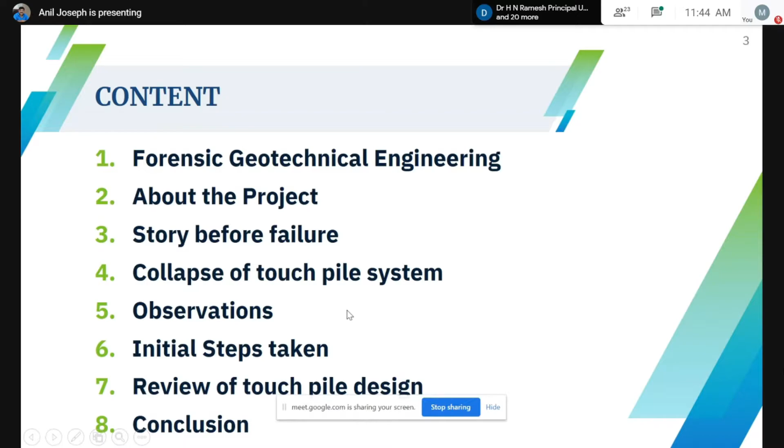I will be covering my talk under the following heads: forensic geotechnical engineering, what it is, the project I am going to present today, the story before the failure, the collapse of the touch pile system, observations, initial steps taken, review of touch pile design, and the conclusion.

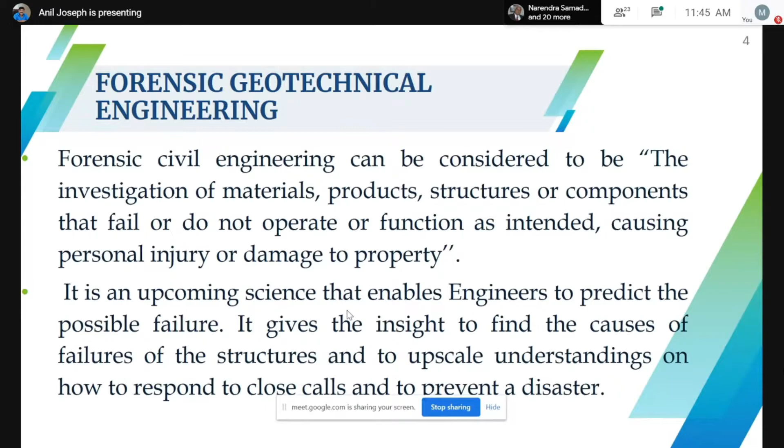Forensic civil engineering can be considered to be the investigation of materials, products, structures, or components that fail or do not operate or function as intended, causing personal injury or damage to property. It is an upcoming science that enables engineers to predict possible failures. It gives the insight to find the causes of failure of the structure and to upscale understanding on how to respond to close calls and prevent a disaster.

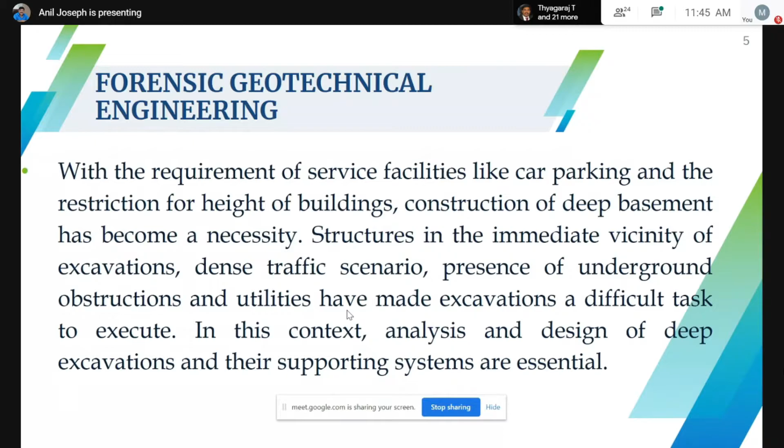With the requirement of service facilities like car parking and restrictions on building height, construction of deep basements has become a necessity. Structures in the immediate vicinity of excavation, dense traffic scenarios, presence of underground obstructions, and utilities have made excavation a difficult task to execute. In this context, analysis and design of deep excavation and their supporting systems are essential.

The basic steps which should be carried out by design engineers for deep excavations are: site characterization, selecting dimensions of excavation, surveying adjacent structures, establishing permissible movements, selecting earth retaining system, selecting supporting and construction scheme, predicting the movements, comparing predicted with permissible movements, altering the supporting and construction scheme if needed, monitoring instrumentation, comparing monitored results with predicted and permissible values, and altering bracings and construction.

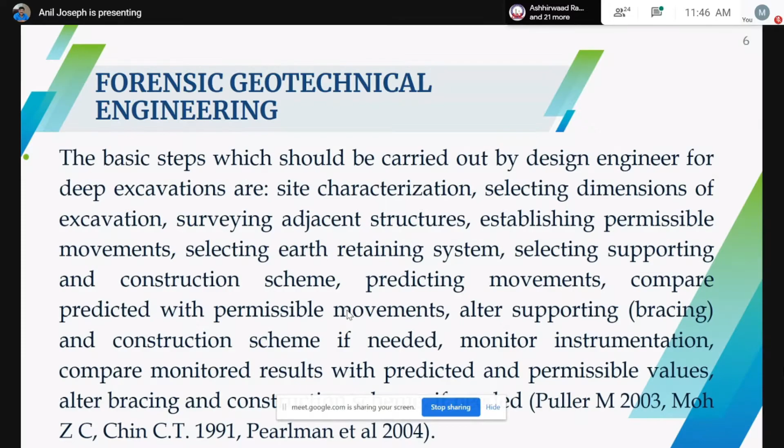Structural engineers work with engineered materials such as concrete and steel that possess unique and well-defined properties of density, elastic modulus, compressive strength, etc. On the other hand, geotechnical engineers deal with soil, a material made by nature or God with highly variable spatial and temporal properties.

Structural designs are code-based since theoretical closed-form solutions are derived based on given geometry, material properties, and loading. However, geotechnical designs are judgment-based, due to highly variable geometry, complex loading, and material properties that are not precisely determinable, and that's the challenge.

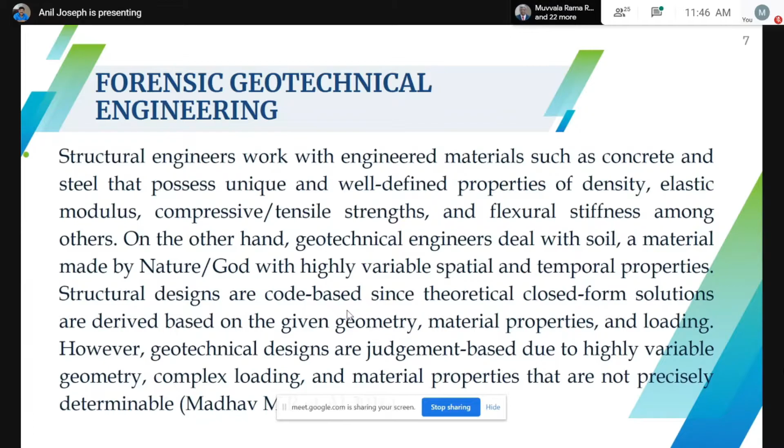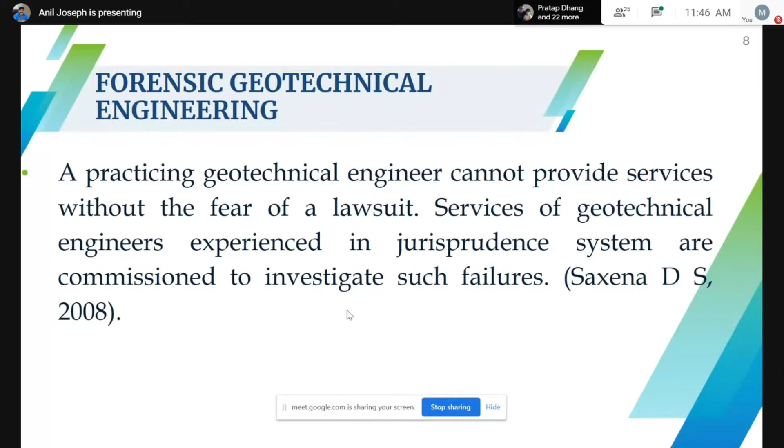This is from Madhav's literature: a practicing geotechnical engineer cannot provide service without the fear of a lawsuit. Services of geotechnical engineers experienced in jurisprudence systems are commissioned to investigate such failures.

Now coming to the problem which I want to share with you today: the touch pile system failure at Kochi, Kerala. So this is the project.

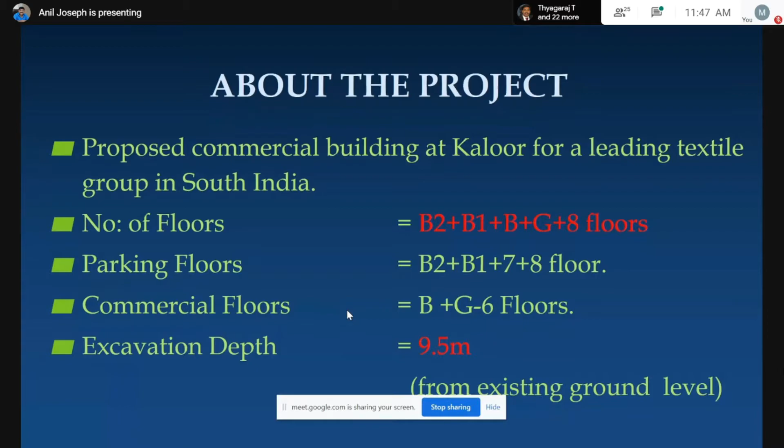It's a B2, B1 basement, ground and 8 floors building. We have parking in the two basements and on the seventh and eighth floor, and commercial floors from basement to ground to the 6th floor. The bottom level of B2 was at 9.5 meters.

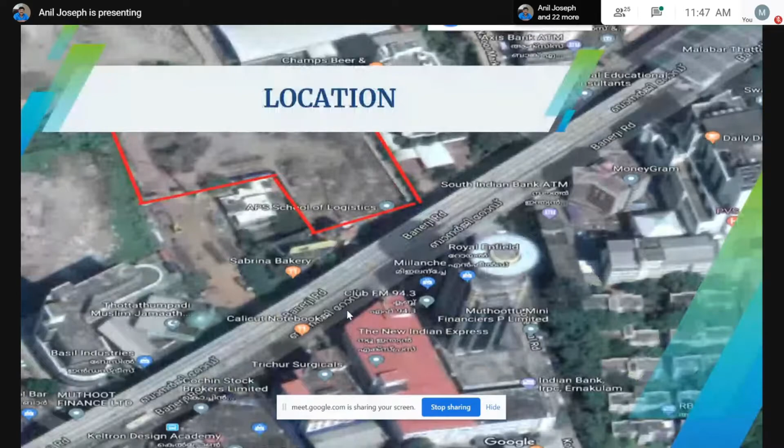The touch pile system, which was designed by a leading structural engineer based out of Chennai, comprised of 337 piles of 900 diameter, extending to a depth of 30 meters, and 28 soldier piles of 600 diameter to a depth of 30 meters. Building piles were taken to very dense strata at 43 to 46 meter depth.

The touch pile system was designed as a propped cantilever to resist the lateral load, because once the propping comes in, the bending moment and shear force get reduced considerably and economy in the design can be brought in.

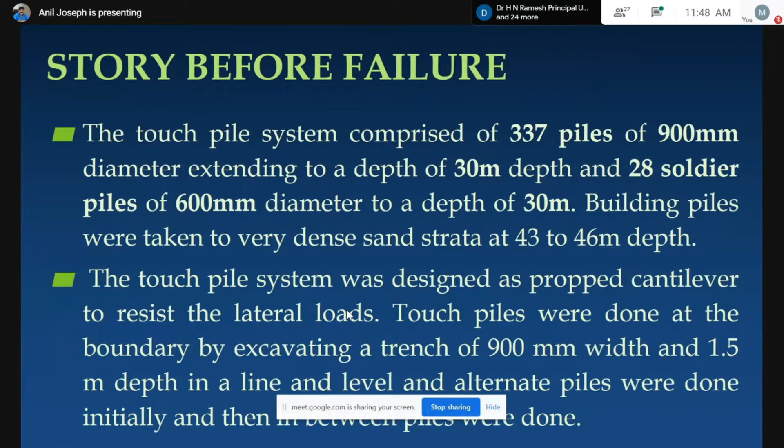Touch piles were done at the boundary by excavating a trench of 900 width and 1.5 meter depth in a line and level, and alternate piles were done initially, and then the piles in between were done.

After completion of shoring works, excavation was done in 3 phases. In the first phase, they excavated up to 2 meters. The second phase went up to 6.5 meters, and the third phase excavation was planned up to 9.5 meters.

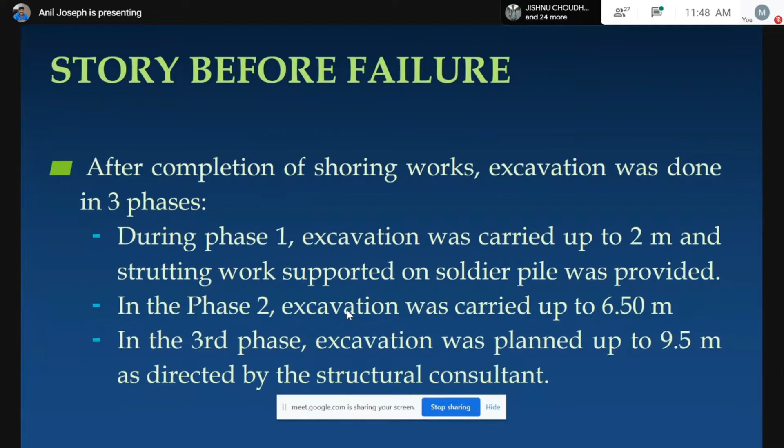So this is the video of the site, and here you can see what was happening. This was on the crucial day of 19th April 2018. You can see the video running here, taken at about 5:36 p.m.

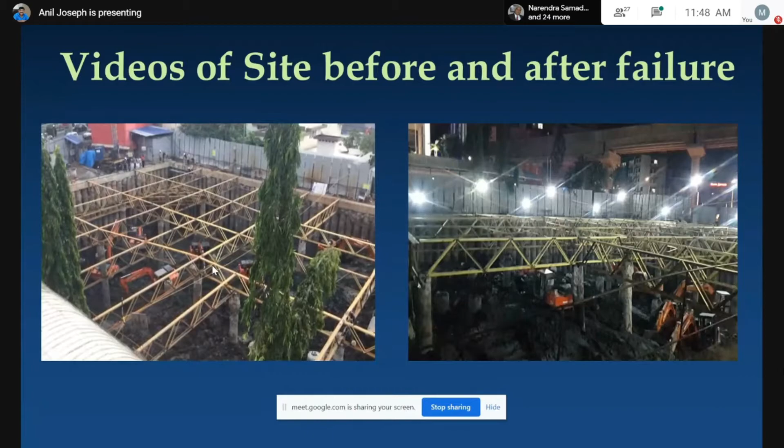By 7 p.m. there was a slight movement, and the wall had tilted by 20 centimeters. They were quite worried about what to do about that.

They asked us, as the local person, what had to be done. We told them it was better to evacuate the people. By around 8 o'clock it started moving further, and by 9 o'clock this happened.

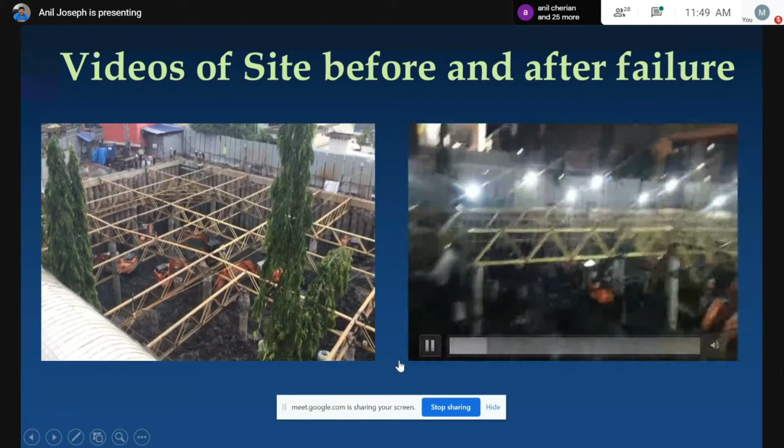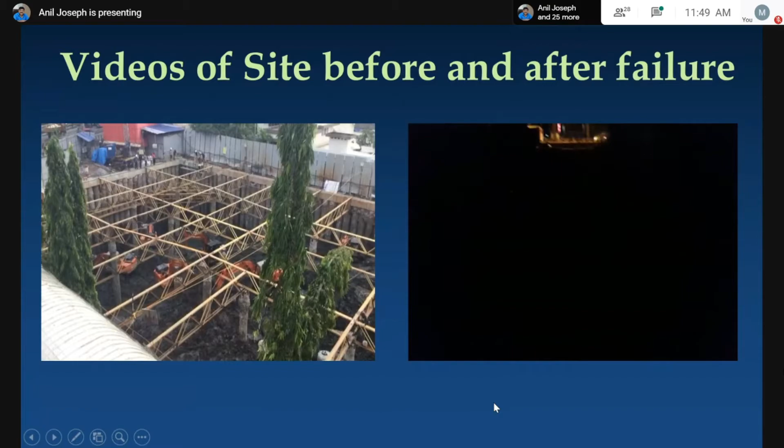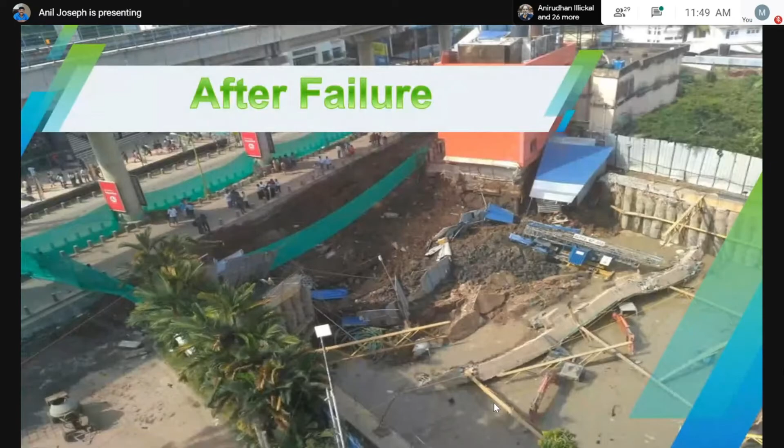That was the video of the failure as it was happening, and these are the photos taken after the failure from the adjacent building. You can see here that the foundation is getting exposed, and this is the after-failure photo.

During the excavation, like I pointed out, at 5:30 p.m. the movement happened and deflection increased by 100. The site team sought advice, and we asked them to stop the work and evacuate the people.

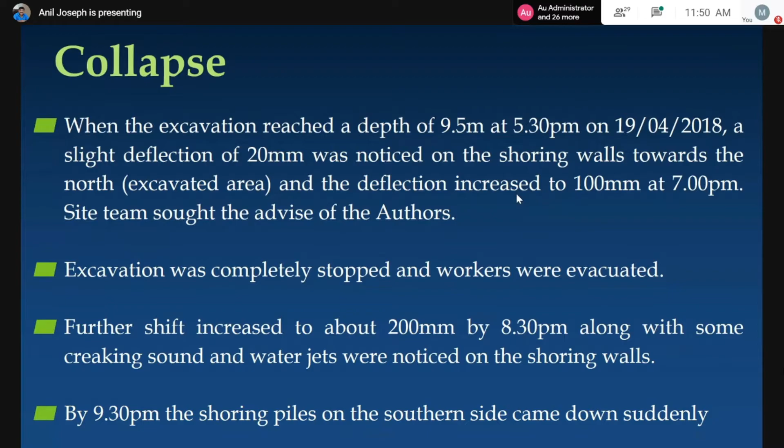The shift further increased to 200, along with some creaking sound, and water jets were noticed on the shoring wall. By 9:30 p.m., the shoring piles on the southern side came down suddenly.

Now, observations after the collapse. Due to the collapse of the touch pile system, the nearby road and earth sunk by approximately 3 meters on the south side of the excavated area. There was lateral shifting of the piles near where the earth had sunk, on the southwest side of the excavated area.

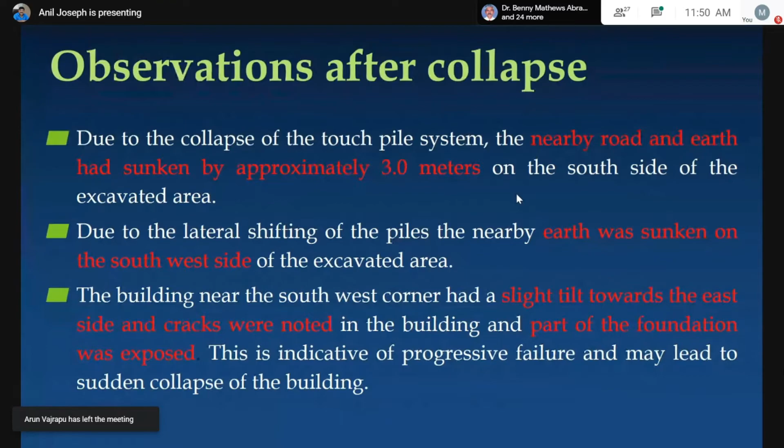The building near the southwest corner had a slight tilt towards the east side, and cracks were noted in the building, and part of the foundation was exposed. This is indicative of progressive failure and may lead to sudden collapse of the building.

Cracks were noted at ground level on all the other three sides of the excavated area. The roads, paved with interlocking tiles, showed differential settlement.

Public utilities such as road, traffic, electricity, and water supply were adversely affected by the collapse. It also resulted in a temporary halt in the working of Kochi Metro, since the structure was very close to the metro station at Kaloor.

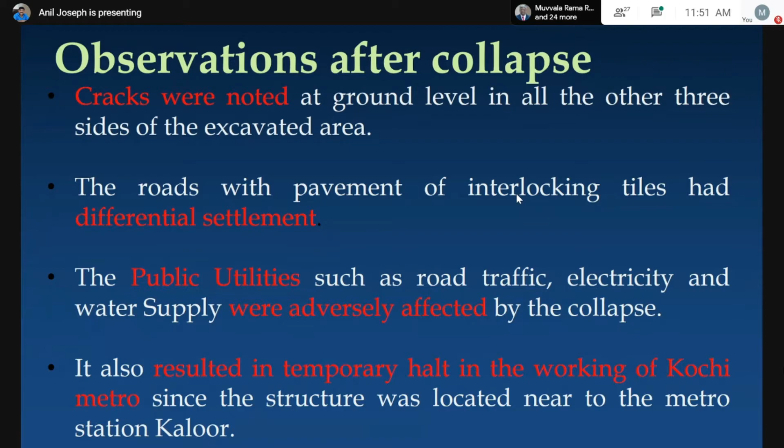So an immediate action plan was made. We were called in, we visited the site, and a committee was formed by the District Disaster Management Authority.

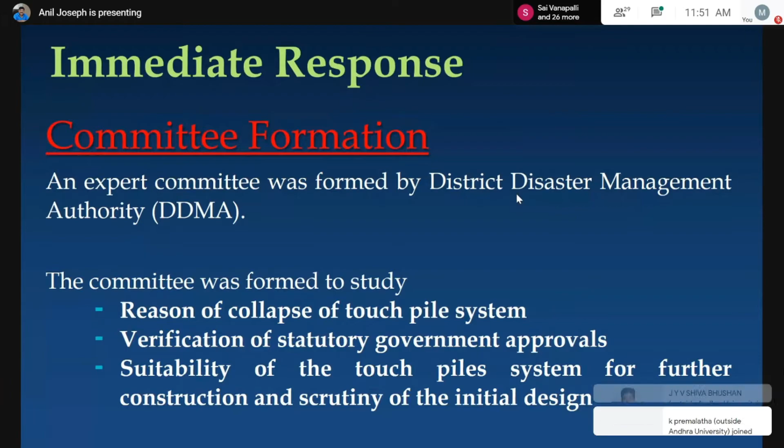The job entrusted to us was to study the reason for the collapse of the touch pile system, verification of statutory government approvals, suitability of the touch pile system for further construction, and scrutiny of the initial design.

These are the steps we took. Since traffic was affected, we rerouted the public traffic. We refilled the excavated area because we felt further collapse was likely, and the adjacent building might be affected.

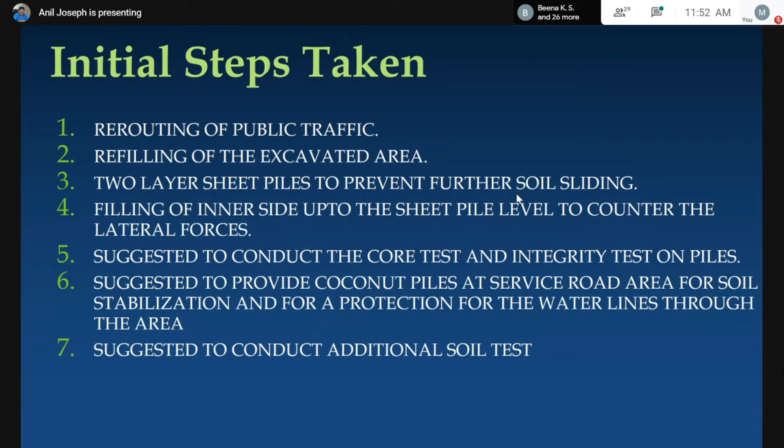Additional soil investigation was done to study what had gone wrong. So these are the snaps. We refilled the area by 5 meters to prevent further damage.

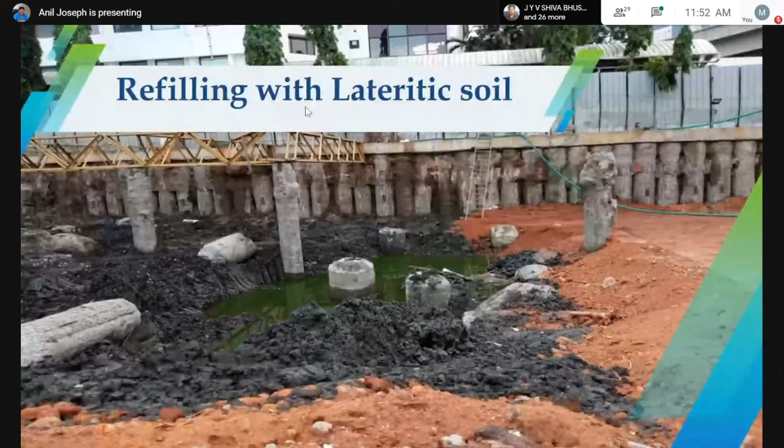This is the refilling done with lateritic soil immediately, to balance the thrust so that there wouldn't be further collapse.

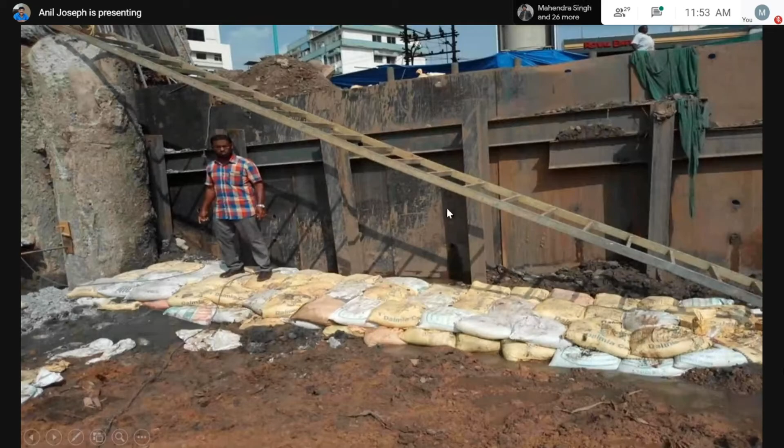The double braced sheet piling was provided, and we went for the concrete core test to find out the reason of the collapse. 11 samples were taken, eight from the touch pile and 3 from the tie beam.

Pile integrity test was conducted, where we had the support of one of our co-members in the Indian Geotechnical Society National Committee, Ravikiran Vaidya, who did that for us, to understand what was the exact point of the failure.

Additional soil investigation to confirm the parameters of subsoil strata was carried out. Geotechnical and structural modeling at different levels was carried out using Plaxis and STAAD software to find out what was the cause of the failure.

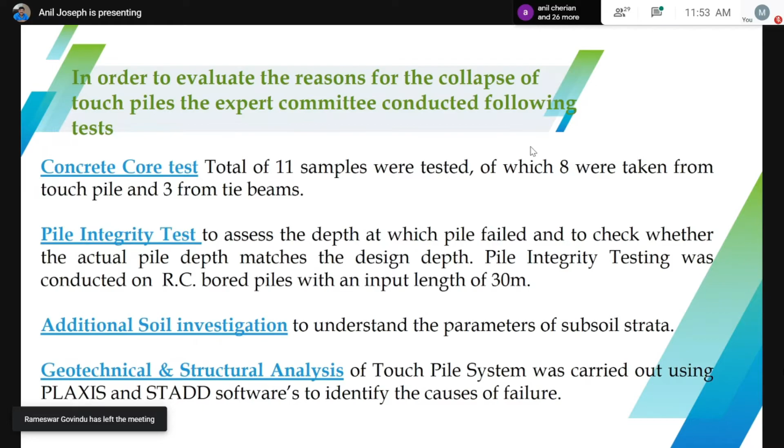Here you can see the integrity test happening, soil testing happening, the core samples getting recovered, the core test was conducted, and it was found that cube strength values were higher than design value, so that was not the problem.

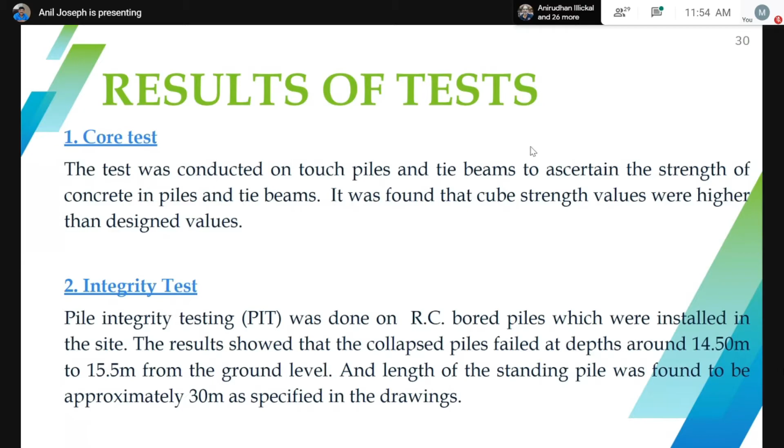Pile integrity test was done, and we found that the piles had collapsed, sheared off at a depth of about 14.5 to 15.5 meters from ground level, and the length of the standing pile was found to be approximately 30 meters as per the design itself.

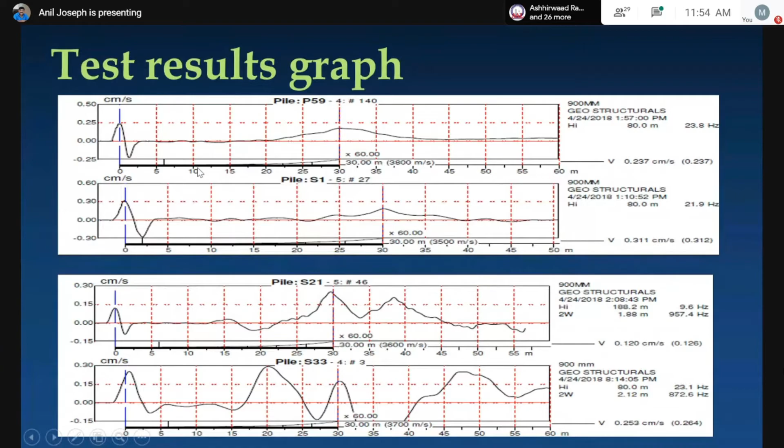This is the data from the pile integrity test, carried out immediately after the collapse. You can see where the damage has been heavily concentrated, where the strata changes, and the damage is also noted at those points.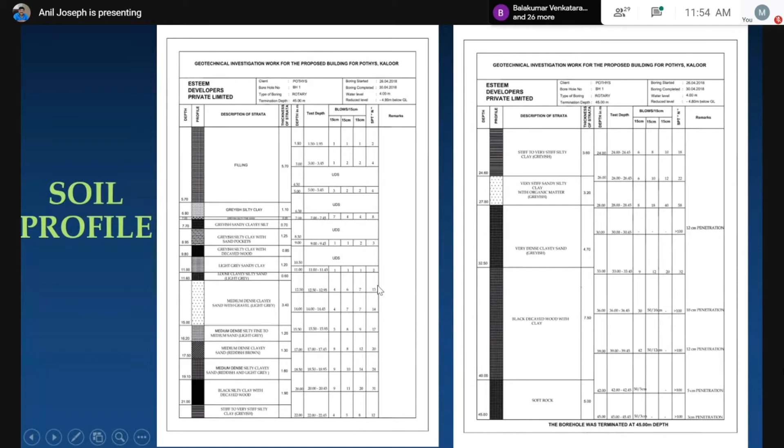This is the additional soil investigation work which was carried out. You can see that Cochin comprises very soft marine clay, and up to 14 to 15 meters there is not much support value.

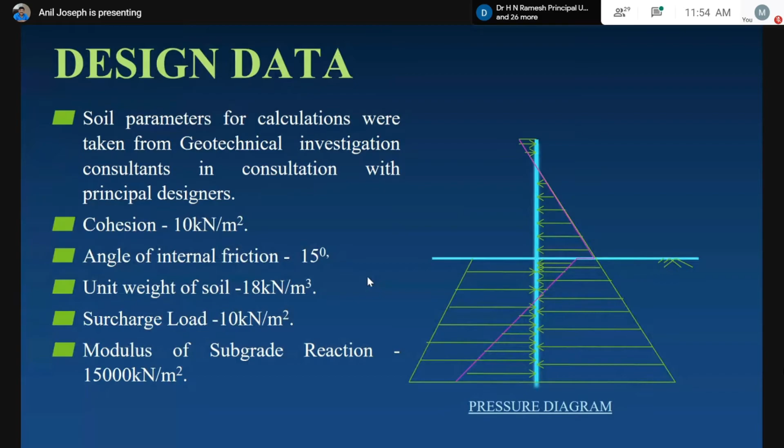We went for modeling analysis to carry out the review of the touch pile design. Soil parameter calculations were taken from the geotechnical data, and these were the different components taken. This is the pressure diagram, and the capacity of the touch pile was worked backward.

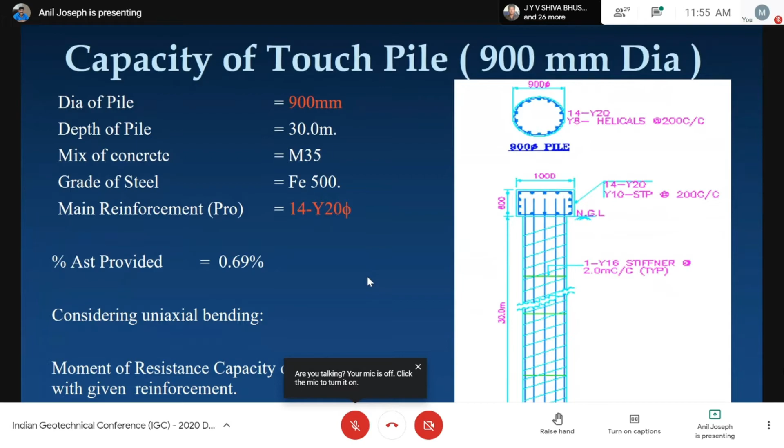The diameter was 900 mm, M35 was the grade of concrete, and we worked out the steel provided, finding that the moment of resistance capacity of the pile was 815 kilonewton meter. That's the one point I would like you to note.

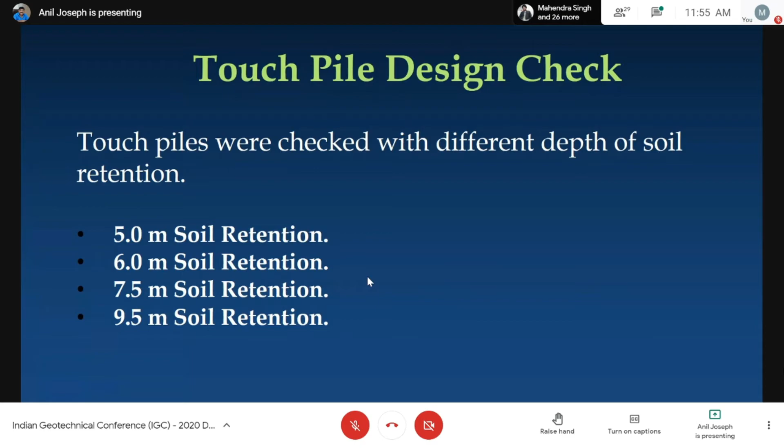Touch piles were checked at different depths of soil retention - at 5 meter, 6 meter, 7.5 meter, and 9.5 meter excavation. At 5 meters, maximum deflection was 44 mm, maximum overturning moment 350, and with MRS of 850, it is safe at an excavation of 5 meters.

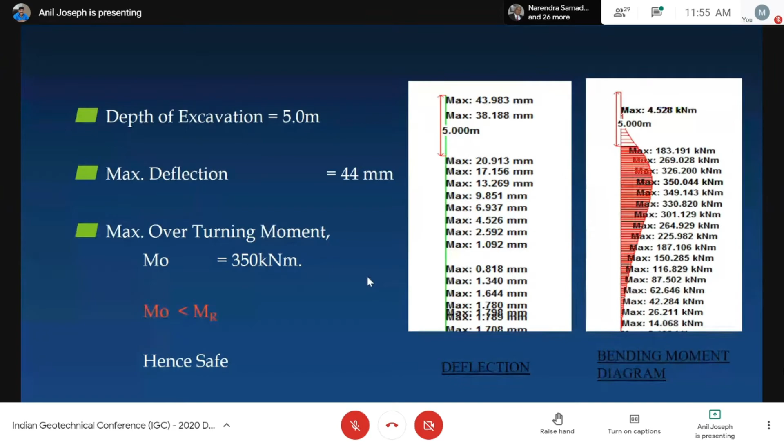At 6 meters, deflection moved to 90 mm, with 633 giving factor of safety of 1.3. Deflection is found to be slightly higher, but since it's a temporary structure, it seems okay.

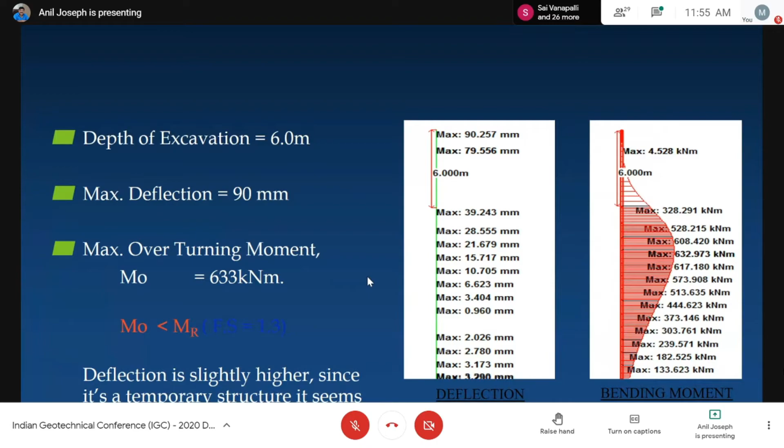Once we move to 7.5 meters, maximum deflection moved to 179 mm, and the overturning moment crossed the permissible capacity - not safe. Deflection and overturning moments are higher, and the bracing system of the touch pile has to come into action to transfer the behavior.

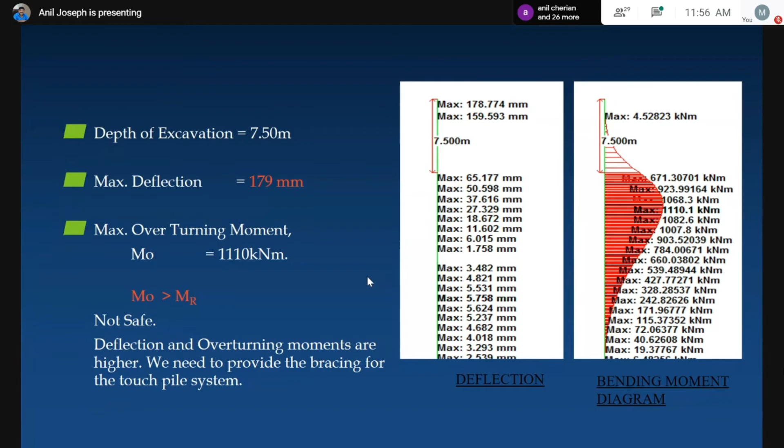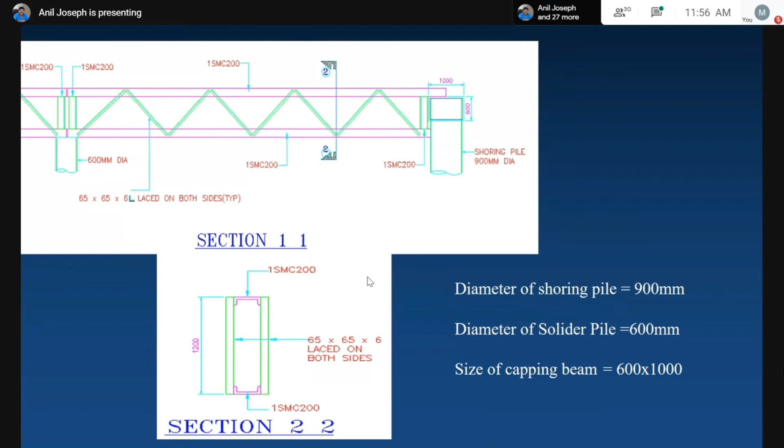This is the bracing system that was put in place. You can see the ISMC double section of 1.2 meter beams provided, with lacing done by 65 angle, and this is the shoring pile diameter and the soldier pile sizes. This is the retention modeling.

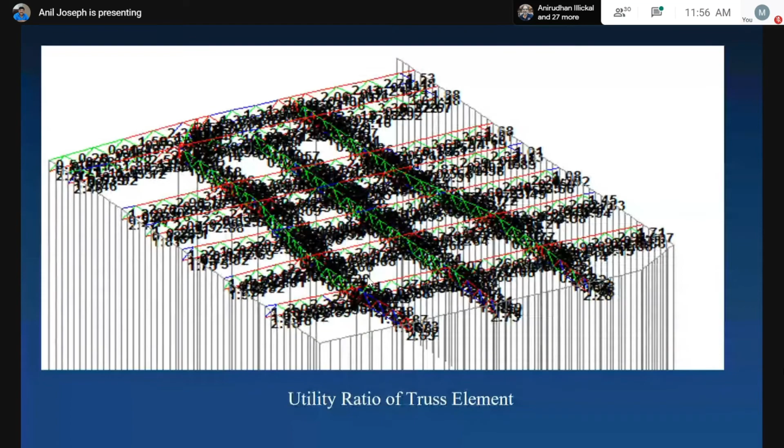You can see the three-dimensional model with the spring and the utility ratio just at the brim - already very close. When the excavation moved to 9.5 meters, we found the deflection was 400 mm, and the movement was much higher than what the pile was capable of withstanding.

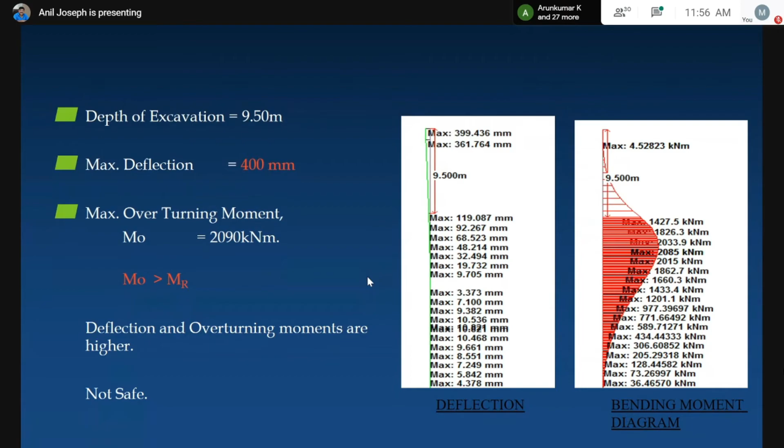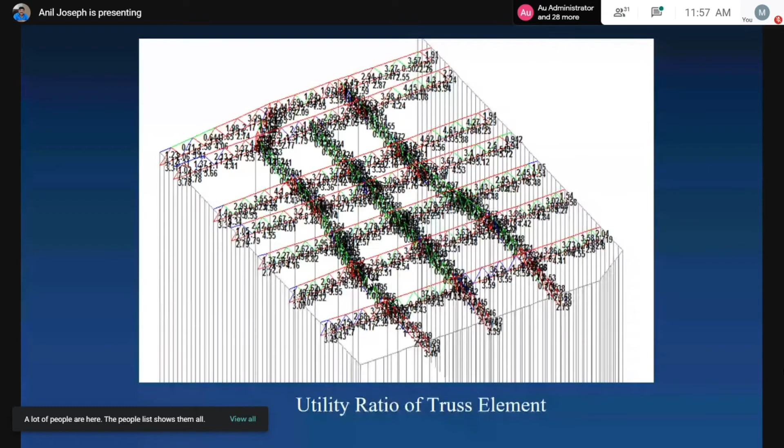So that is 2090 kilonewton meter, and deflection and overturning moments are higher, and it's not safe. For the 9.5 meter strata, the utility ratio jumps up to the range of 3.55 to 3.7, indicating inadequacy of the bracing system to take care of the loading which is going to come. Since there is failure in truss element, deflection and overturning moments were also much higher.

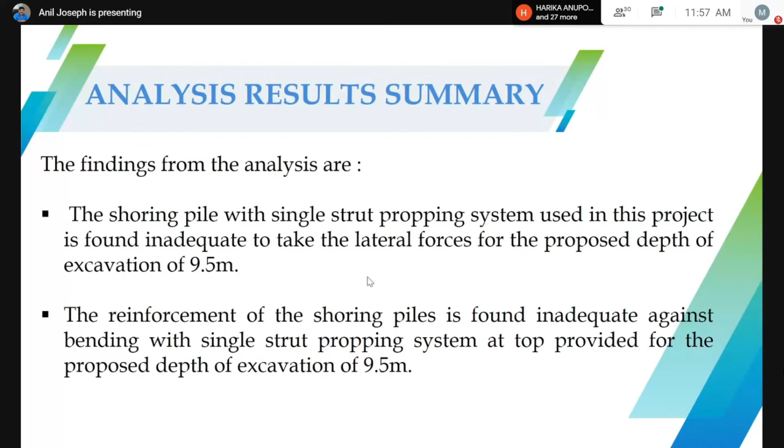So the analysis result summary: the shore pile with single strut propping system used in this project is found inadequate to take the lateral forces for the proposed depth of excavation of 9.5 meter. The reinforcement of the shoring pile is found inadequate against bending with the single strut propping system at top provided for the proposed depth of excavation of 9.5 meter.

For excavation carried out up to 6 meter depth, the touch pile system comprising of 90 centimeter diameter piles without strutting was adequate. When depth reaches 7.5 meter, the strutting system was found to have marginal deficiency to take up the earth pressure, and for the depth of 10 meter, the provided touch piling system and strutting was grossly inadequate to take up the lateral thrust.

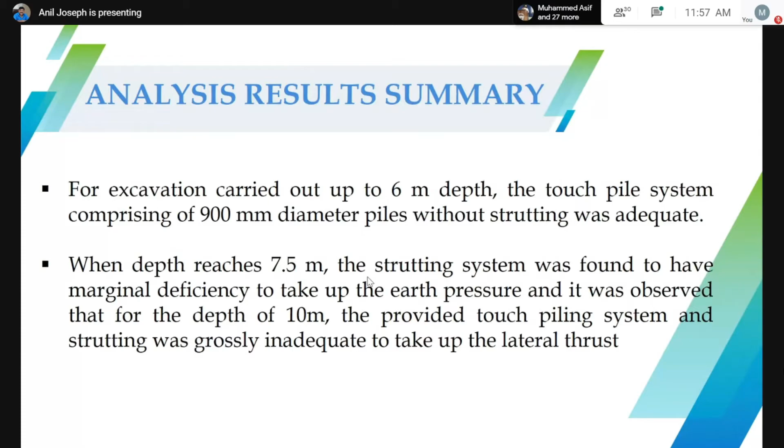The strutting system used was a series of truss beams in a grid pattern but not orthogonal to each other. This will have a tendency to make the grid system skewed and to facilitate further yielding of the props.

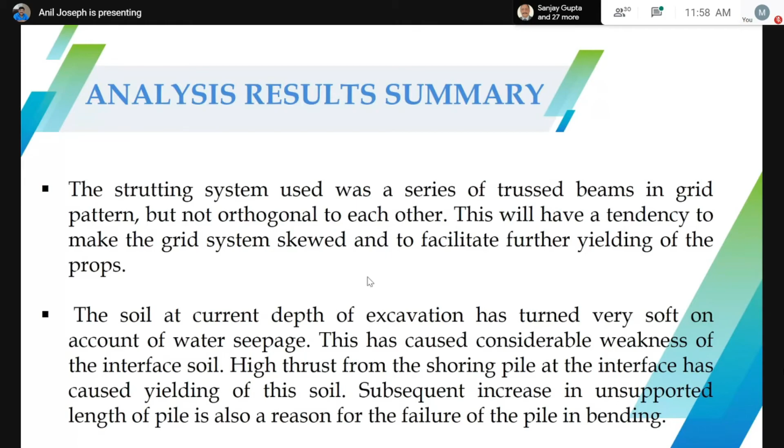Soil at the current depth of excavation has turned very soft on account of water seepage. This has caused considerable weakness of the interface soil. High thrust from the shoring pile at the interface has caused yielding of this soil. Subsequent increase in unsupported length of the pile is also a reason for the failure of pile in bending.

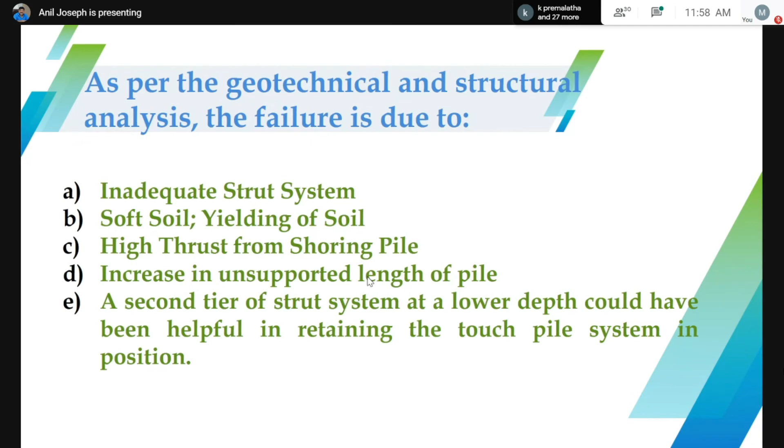So as per the analysis: inadequate strut system, soft soil, yielding of soil, high thrust from shoring pile, and increase in unsupported length of pile. A second tier of strut system at a lower depth could have been helpful in retaining the touch pile system in position. So this was the suggestion of the technical committee.

The team scrutinized all the approval documents needed for the project and they were found in order. If adequate bracing system with higher sections and proper balanced geometry is adopted, the present touch pile system installed can take up the lateral earth pressure due to the excavation up to the proposed depth of 9.5 meter.

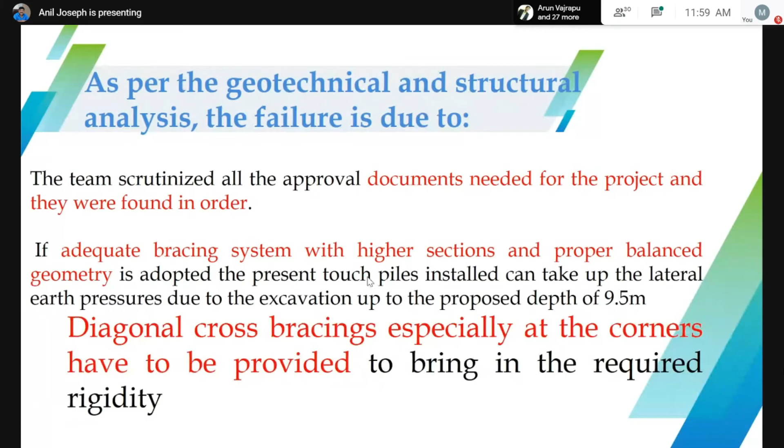Diagonal cross bracing, especially at corners, have to be provided. We always have to remember this when we go for deep excavation, to bring in the required rigidity. That is the most vulnerable point.

It is also suggested that the setback of the building, the touch pile system near the road, be increased by an additional 4 meters so that the road and the public utility system remain unaffected.

The committee felt that the collapse of the touch pile system of the building should serve as a wake-up call to the authorities and engineers in the construction industry. It is only sheer luck and timely intervention that there was no loss of human life.

There was only one building close by and it has to be dismantled now, with workers in the excavated area and with buildings close by. It would have been not just a failure but a catastrophe.

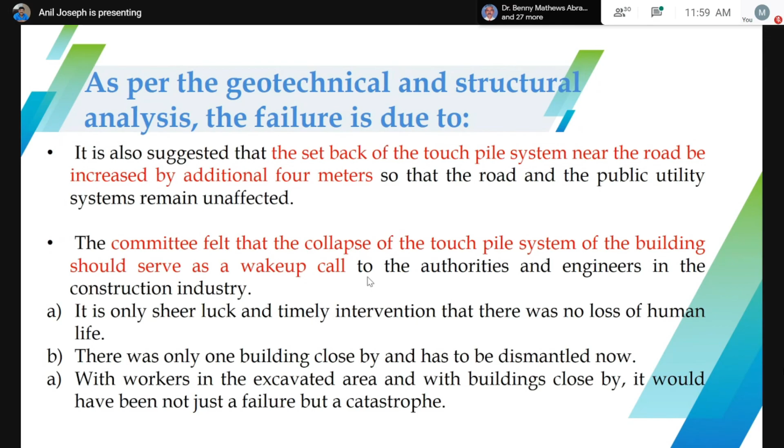So the conclusions to be drawn: accurate cost analysis or work study is difficult to carry out as there is limited commonality to make comparison. Every project, though it looks relatively similar from certain indicative factors, is in fact unique in itself. A great number of random and uncontrollable variances are likely to arise during the course of work.

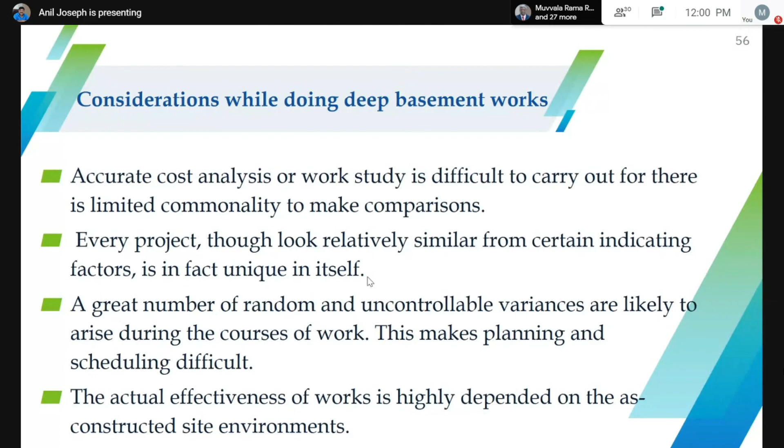This makes planning and scheduling difficult and our profession very interesting. The actual effectiveness of work is highly dependent on the as-constructed site environment, quality of the management and executive parties, as well as the problem-solving ability of the frontline persons, which also seriously affects the performance and effectiveness of work.

Dynamic layout arrangement is usually required for the removal of the excavated soil from the basement. This may involve forming of a temporary ramp, provision of special equipment, or taking over of part of the completed building